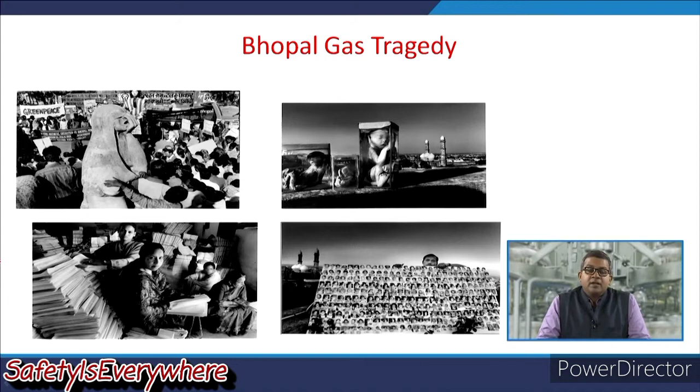Now the gravity of this gas tragedy you can imagine through these photographs, and these photographs are quite disturbing, but they tell you how worst this accident was. These are some of the photographs which were published in different newspapers and magazines across the globe.

The result of this release was that 500,000 people were exposed to the methyl isocyanate gas, and 25,000 have died to date as a result of their exposure. More than 120,000 people are still suffering from different types of ailments caused by the accident and subsequent pollution at the plant site.

These ailments include blindness, extreme difficulty in breathing, gynecological disorders, carcinoma, etc. This site in Bhopal has never been properly cleaned up, and it is sometimes said that it continues to poison the residents of Bhopal.

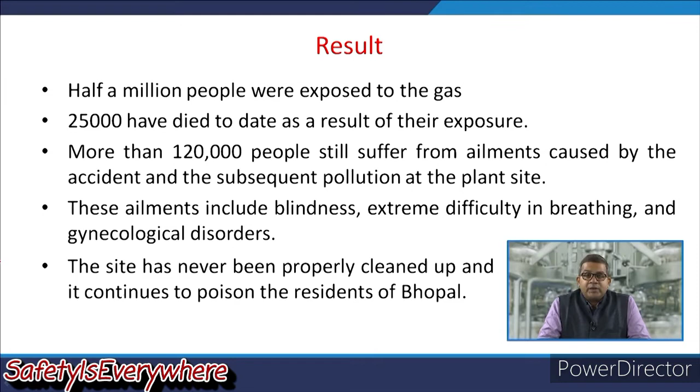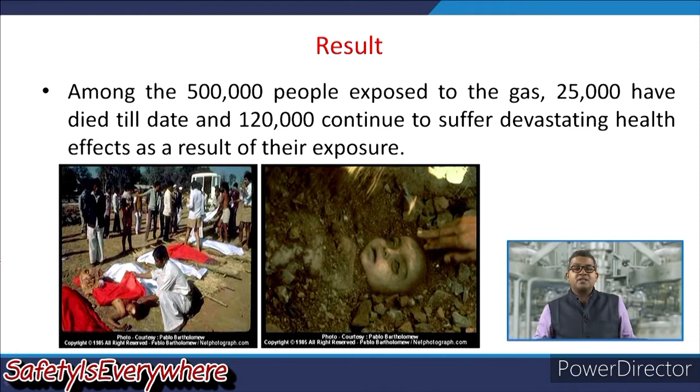The purpose of this slide is that you can imagine how severe that accident was and why we are saying this is one of the worst accidents in history. At the time of exposure, almost 5 lakh people were exposed, and people are still suffering, as you can see in these different images of the accident.

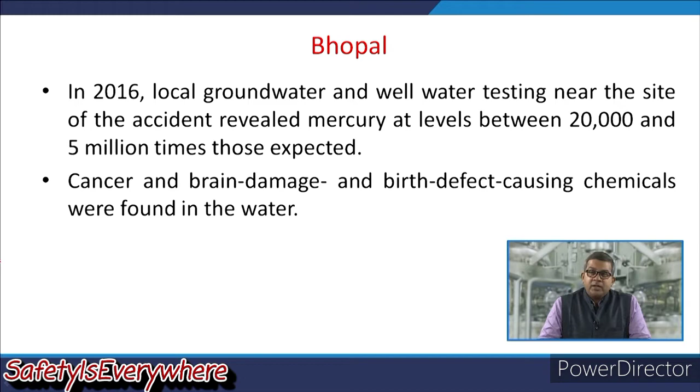In 2016, local groundwater and well water testing near the site of the accident revealed mercury levels between 20,000 and 5 million times those expected. Chemicals causing cancer, brain damage and birth defects were found in the water.

So let us have a look about this accident. At the start, we would like to have a brief knowledge about the company and its management. Union Carbide began its operations in India way back in 1904. In 1983, they were having 14 plants operating in the country.

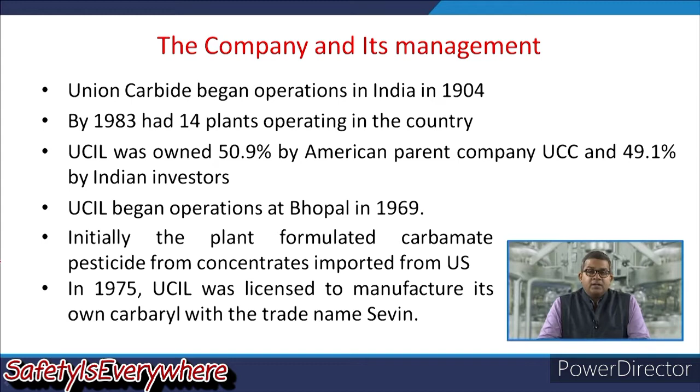At the time of the accident, Union Carbide India Limited was owned 50.9% by the American parent company, Union Carbide Corporation, and 49.1% by Indian investors. Union Carbide India Limited began operations in Bhopal in 1969, and initially this plant formulated the carbamate pesticide from concentrate imported from the United States West Virginia plant. In 1975, they were licensed to manufacture its own carbaryl with the trade name Sevin.

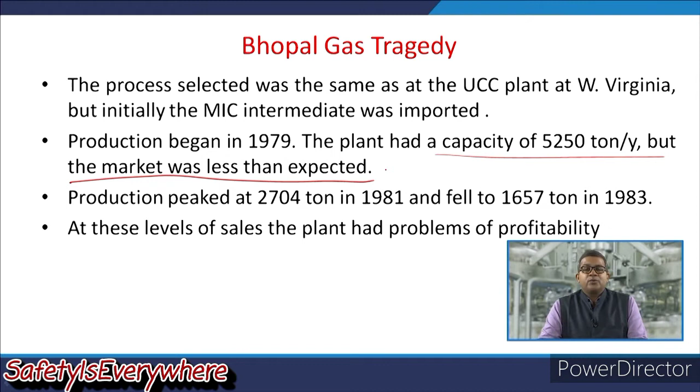While analyzing the root cause of the accident, we can remember that the market scenario was not up to the mark for Union Carbide, and this is one reason why they curtailed several safety measures, because the plant was running under loss. Production peaked at 2,704 tons in 1981 and fell down to 1,657 tons in 1983. At these levels, the sales of the plant had the problem of profitability, and that's why they were forced to curtail several safety measures and other trained workers.

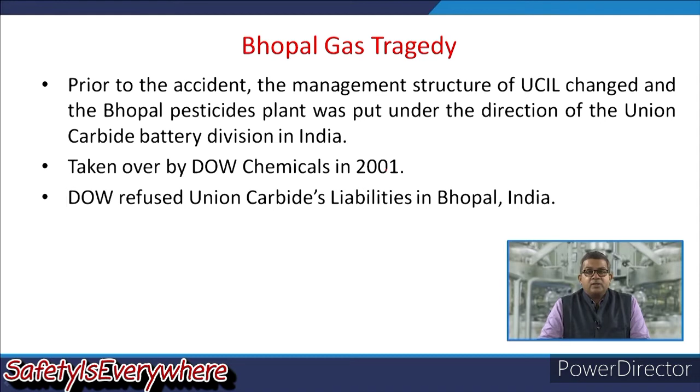Prior to the accident, the management structure of UCIL changed, and the Bhopal pesticide plant was put under the direction of the Union Carbide Battery Division in India. The entire Union Carbide operation globally was taken over by Dow Chemicals in 2001, but Dow Chemical refused to take any kind of Union Carbide's liability in Bhopal.

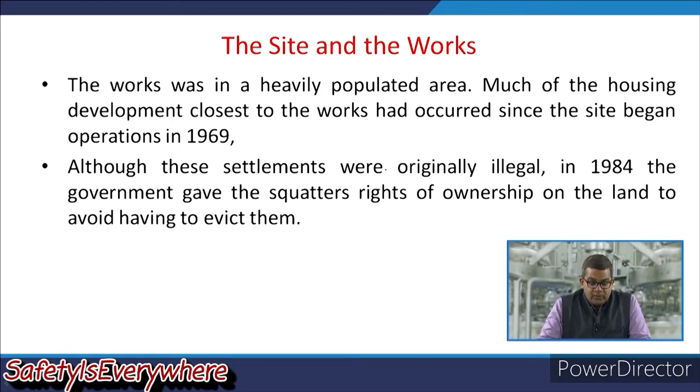So this is the site, it's Bhopal, and this is the site of that particular Union Carbide plant. This is the upper lake, and this was the Union Carbide plant, and these two were the nearby hospitals, and this is the railway line.

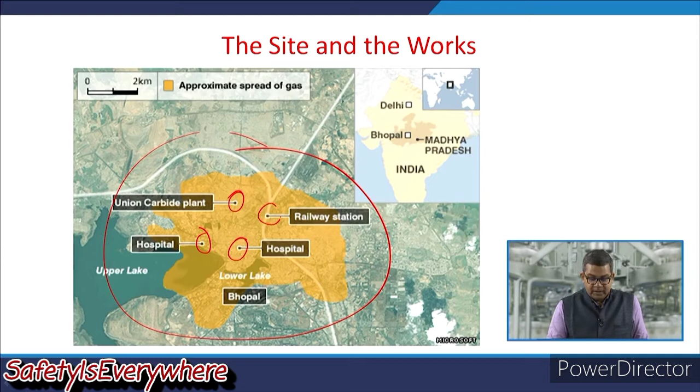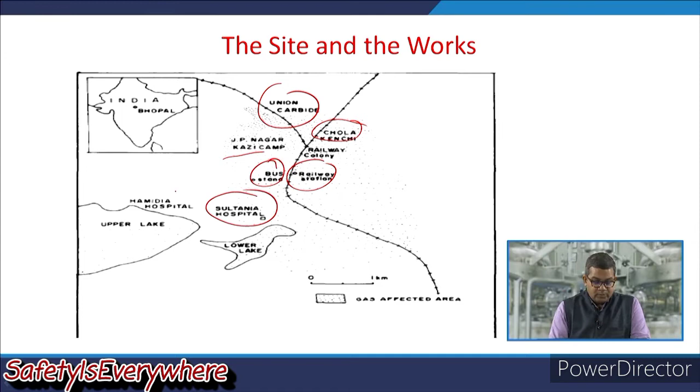Now you can have a more specific look of this site. This was the Union Carbide plant adjacent to the JP Nagar and the Kazi camp and Chola Kenchi and bus stand, railway line. There were two hospitals, Hamidia hospital and Sultania hospital.

Now this is the process, because this is the prima facie important aspect for any accident investigation, to have a look at the process and the plant scenario. So Union Carbide used to produce phosgene on site. The phosgene used to react with monomethylamine, MMA, to give methyl carbamoyl chloride, MCC, with hydrogen chloride and a little bit of heat being liberated. So this is purely an exothermic reaction.

Now this methyl carbamoyl chloride is subjected to destructive distillation, producing methyl isocyanate and HCl.

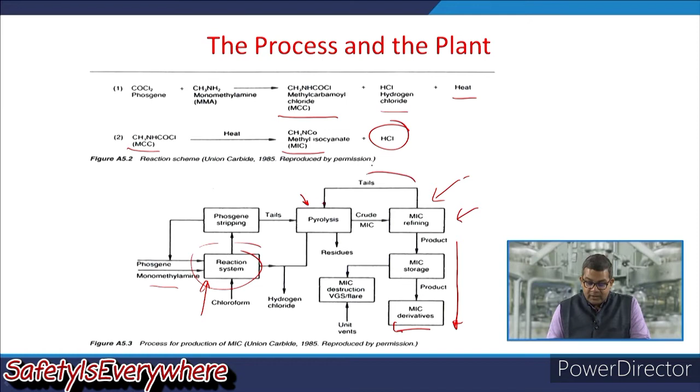Now this is the flow diagram of the entire production facility. The phosgene and monomethylamine reaction system had a chloroform quenching step, and then this entire content was subjected to pyrolysis, and through pyrolysis the product MIC is subjected to refining. It is subjected to MIC storage and different derivative streams, and whatever is left behind, like tails etc., is sent back to the pyrolyzer, and hydrogen chloride etc. are just reaction byproducts.

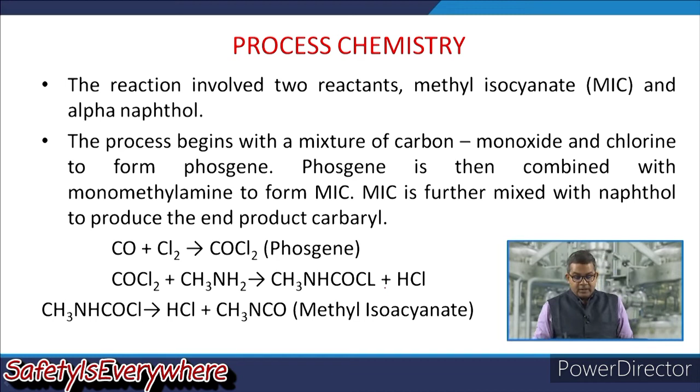So basically the reaction involved two reactants, methyl isocyanate and alpha naphthol. The process begins with the mixture of carbon monoxide and chlorine to produce phosgene, and phosgene is then combined with monomethylamine, as in this particular slide, to form MIC. Now MIC is further mixed with naphthol to produce the end product carbaryl. So this was the entire stream, and the chemical reactions are given in these lines.

So phosgene was produced on site by reacting chlorine and carbon monoxide, and this carbon monoxide was also produced on site. That's why when the gas initially leaked, the prima facie information provided by Union Carbide to the local authorities was that it was chlorine. But the treatment of chlorine is entirely different from methyl isocyanate. We will discuss this particular aspect in due course of time.

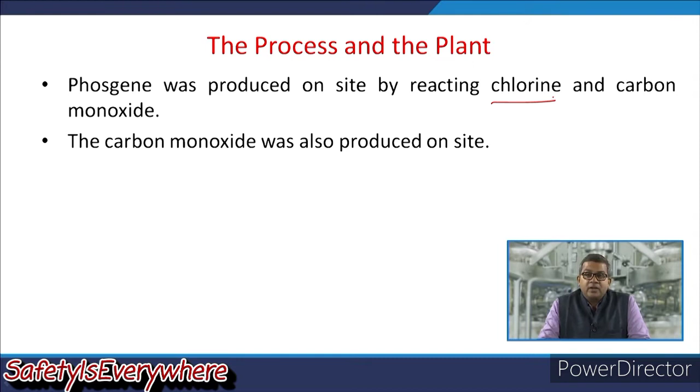Now let us look at the main problematic area, the MIC storage system. The MIC storage system consisted of 3 storage tanks, 2 for normal use, tank number 610 and 611, and 1 for emergency use, named tank number 619. You can see the entire storage battery here. These tanks were 8 feet in diameter and 40 feet long, with a capacity of 15,000 US gallons each, and they were made of SS304.

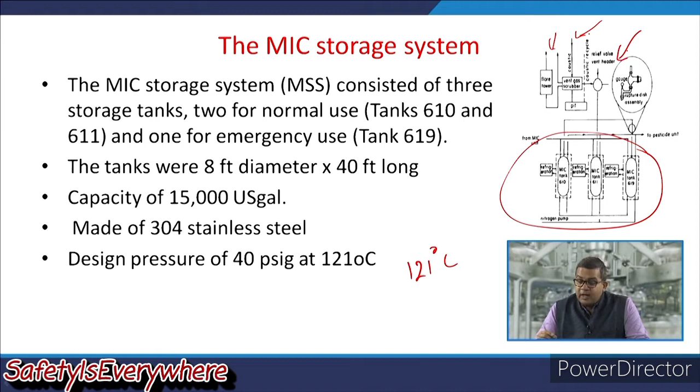The design pressure of each tank was 40 psig at 121 degrees Celsius. Now these are critical parameters because when the accident took place, the temperature was on the higher side, as well as the pressure. Every tank in this entire storage battery was fitted with different safety measures: a vent gas scrubber, a flaring tower, and a relief valve vent header, and these were the cause of the release.

So in a nutshell, when we discuss all these things, let's first have a look at the root cause. Somehow the pressure inside a tank was built up, and MIC escaped through the relief valve vent header, which was primarily meant for taking care of pressure release.

This is subjected to the vent gas scrubber, so if there is any kind of leak of MIC, it can be scrubbed out with the help of a caustic solution, and whatever off gases remain can be flared off. So the entire assembly, the entire plant, had very good safety norms.

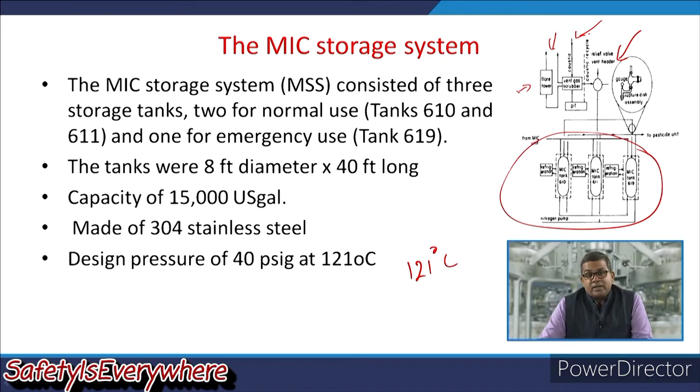Now there are 2 issues. One is that since they were very much aware about the gravity of this MIC, why was the proper information not passed on? And the second issue is why these safety devices were not actuated at the time of the accident. We will discuss these things in due course in this particular module.

Now let us have the autopsy of these safety devices.

There were two vent headers going into the column. One was the process vent header, PVH, which collected the MIC system vent, and the relief valve vent header, which is the safety device that collected the safety valve discharge. So whatever discharge was there from the safety valve, they used to collect through the relief valve vent header, and whatever system vents were there for MIC, that was collected through the process vent header.

Each vent header was connected both to the VGS and the flare, and could be routed to either. The vent stack after the VGS was 100 feet in height.

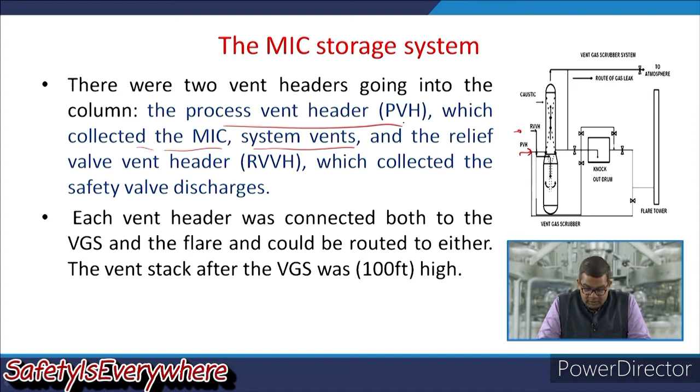The VGS, the vent gas scrubber, had the function of handling the process vents from the PVH and receiving contaminated MIC in either vapor or liquid form, and destroying it in a controlled manner.

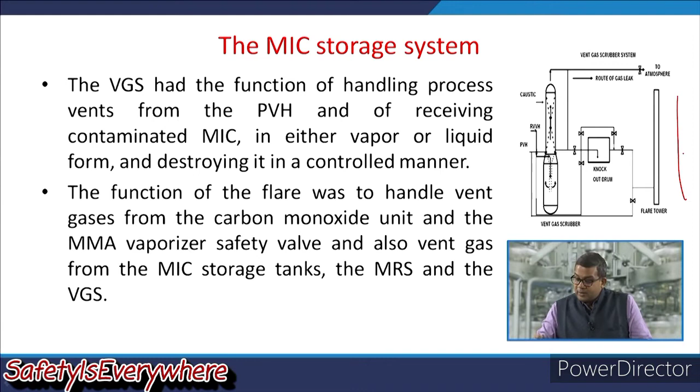The function of the flare was to handle vent gas from the carbon monoxide unit and MMA vaporizer safety valve, and also vent gas from the MIC storage tank, MIC refining still, and the vent gas scrubber. So everything dangerous was ultimately subjected to this flaring tower for destructive flaring off.

Now let us have a look at methyl isocyanate and its properties. We are discussing the abridged MSDS of methyl isocyanate. Methyl isocyanate is a colorless liquid with a normal boiling point of 39 degrees Celsius. It has very low solubility in water.

It is relatively stable when dry, but is highly reactive, and in particular it can polymerize and will react with water. It is flammable and has a flash point of minus 18 degrees Celsius and a lower flammability limit of 6% volume by volume.

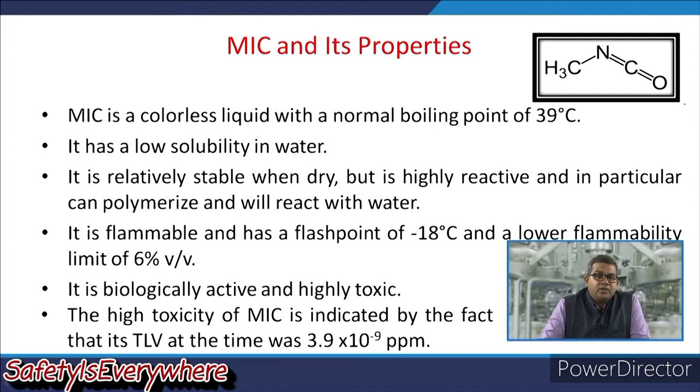It is biologically active and extremely toxic in nature. The toxicity of MIC is indicated by the fact that its TLV is very low. At the time of the accident it was very low.

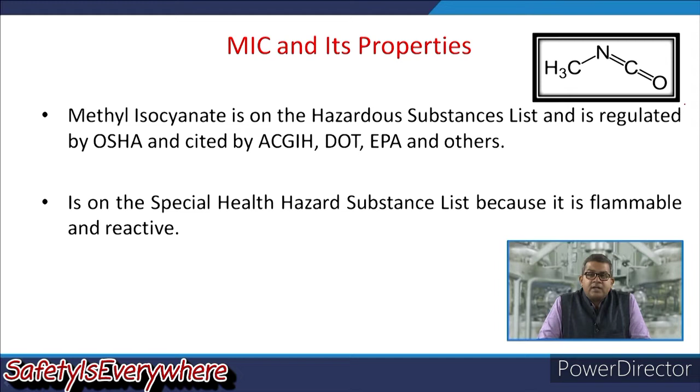This MIC is on the hazardous substance list and is regulated by OSHA, the Occupational Safety and Health Administration, United States, and cited by ACGIH, the Department of Transportation, the Environmental Protection Agency, and others. So it is on the special hazard substance list because it is flammable and extremely reactive.

This MIC is an irritant gas and can cause lung edema, but it also breaks down in the body to form cyanide. The route of this breakage is again important because it was the root cause of so many fatalities.

This MIC can undergo exothermic polymerization to the trimer, a reaction catalyzed by hydrochloric acid and inhibited by phosgene. It also reacts with water, with iron being a catalyst for this reaction, and this reaction is strongly exothermic. This reaction took place in the storage facility of MIC, and that was the root cause of that particular accident.

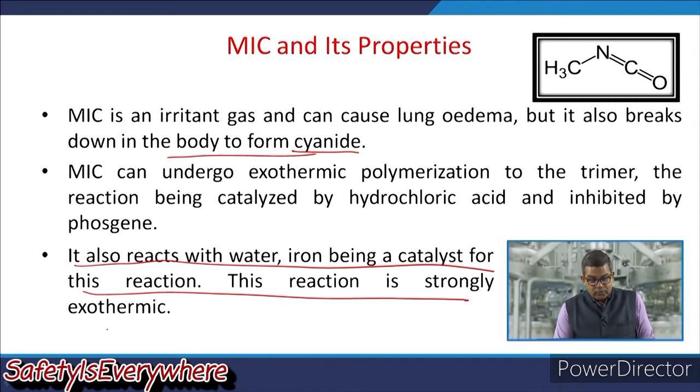Now, its vapor is twice as heavy as air. The vapor used to stay close to the ground when released. MIC and water react to yield methylamine and CO2.

We have presented two reaction streams. One is when water is in excess, which produces 1,3-dimethylurea, and when MIC is in excess, it produces 1,3,5-trimethylbiuret. Upon polymerization, this gives trimethyl isocyanurate, and the formation of this particular component was the cause of this worst tragedy. The methylamine usually reacts further with MIC and other reactants to produce 1,3-dimethylurea. We have presented these two reaction streams for a better look at the root cause: if water is in excess, we get one product, and if MIC is in excess, we get the other.

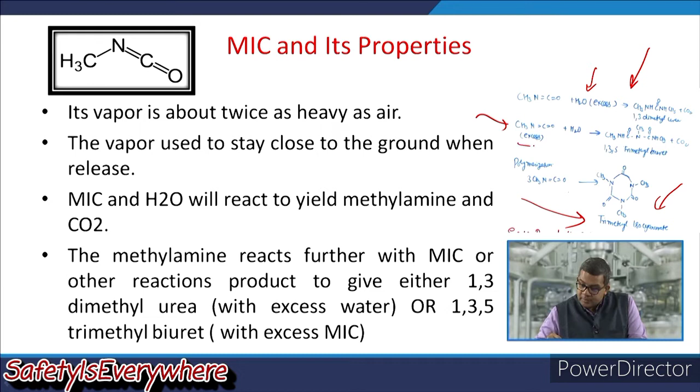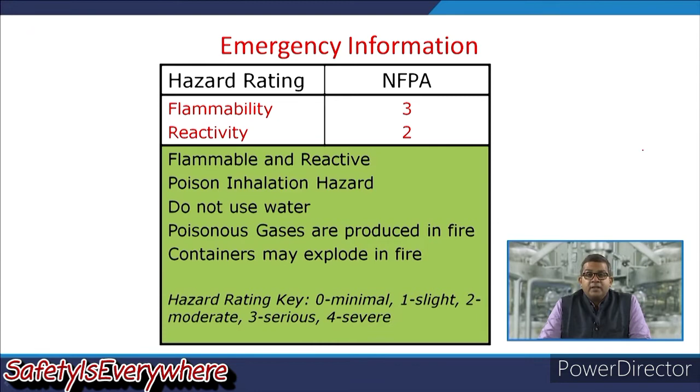Now this is the emergency information and hazard rating. It is extremely flammable, so the flammability rating is given as 3, and the reactivity is also on the higher side, given as 2. So it's flammable and reactive, a poison inhalation hazard, and it is advised while using MIC not to use water, because as we have seen, it may react with water to form the isocyanate products. These poisonous gases are produced in fire, and containers may explode in fire.

At the time of the accident, various other chemicals were stockpiled by Union Carbide at the Bhopal facility, including methylene chloride, methanol, and others used in various reactions. They used to produce phosgene from carbon monoxide and chlorine, and this phosgene was used to produce MIC and other products. They used a variety of chemicals including different solvents and catalysts like trimethylamine, and they produced various products like carbaryl and sevin.

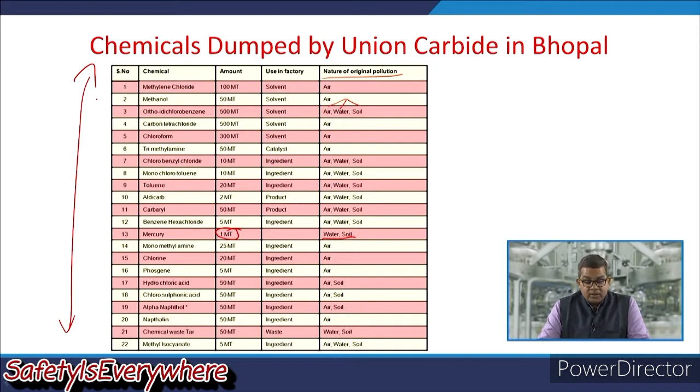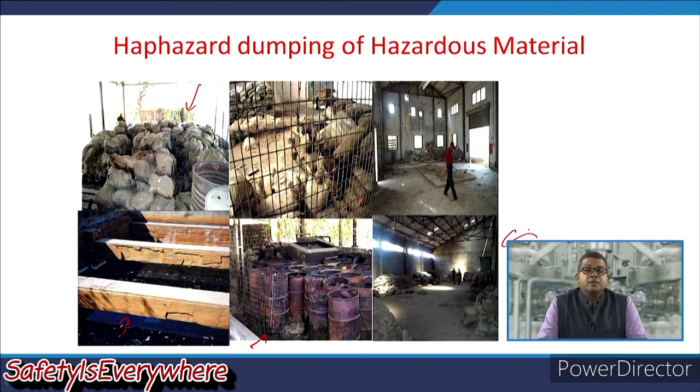In this slide we have listed the nature of the original pollution, which could be in air, water or soil. For example, they had one metric ton of mercury, an extremely dangerous substance that could contaminate water and soil. They had a large inventory of chemicals in the plant, and we've listed the amounts dumped by Union Carbide at Bhopal. This was again on the excess side. You can see this haphazard dumping of hazardous materials - they were not following proper storage protocols for these chemicals.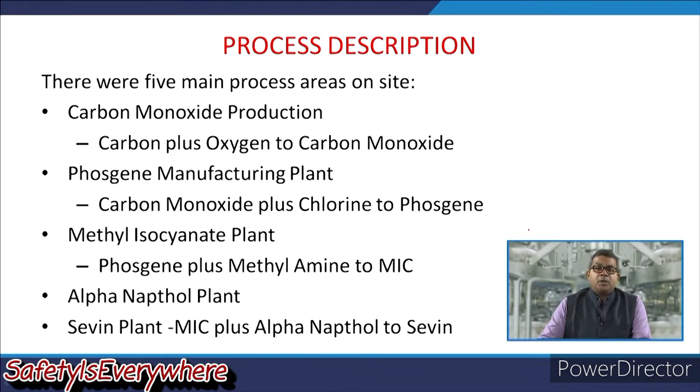Now let us look at the process description. There were five main process areas: carbon monoxide production from carbon plus oxygen, the phosgene manufacturing unit combining carbon monoxide plus chlorine, the MIC plant where phosgene plus methylamine produced MIC, and the alpha naphthol plant producing Sevin from MIC plus alpha naphthol. This last process involves the chemical reaction and distillation to give MIC.

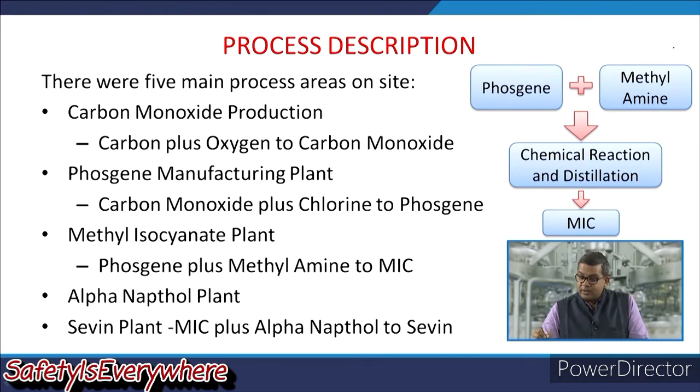There were several events attributed prior to the release. In 1982, a Union Carbide Corporation team from the United States, including safety personnel, visited the Bhopal facility. Their report gave a favorable summary overall but listed 10 safety concerns, including the potential for release of toxic material in the phosgene or MIC unit area or storage area, due to equipment failure, operating problems, or maintenance issues.

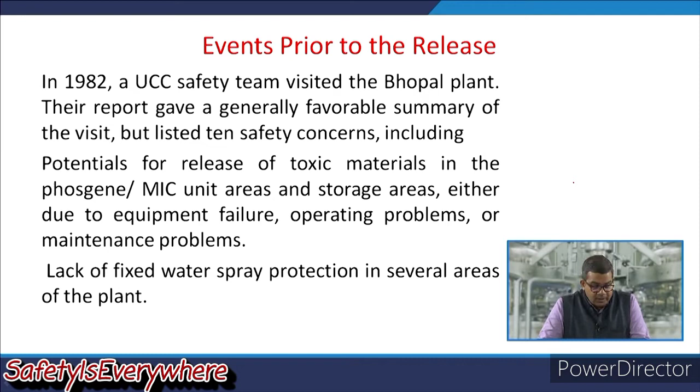They noted a lack of fixed water spray protection in several areas of the plant, and several deficiencies in safety valves and instrument maintenance programs. They reported deficiencies in master lockout procedure application. There were also several problems created by high personnel turnover at the plant, particularly in operations - as we've already discussed, this turnover was due to the plant running at a loss.

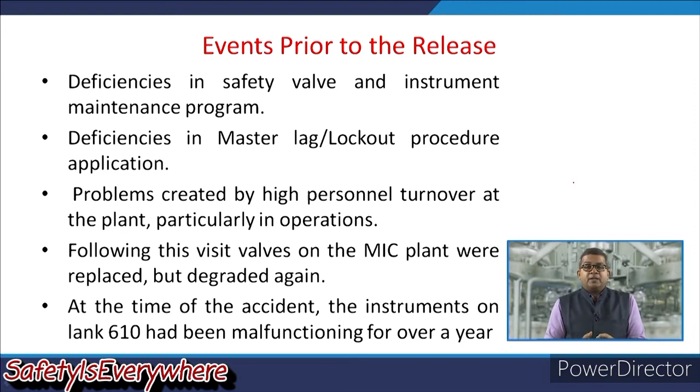Following this visit, the valves on the MIC plant were replaced but degraded again. They never investigated why these MIC valves kept degrading repeatedly. Had they noticed and analyzed this aspect, the problem could have been rectified much earlier than this worst accident. At the time of the accident, the instruments on tank number 610 had been malfunctioning for over a year, an outcome identified by a safety review.

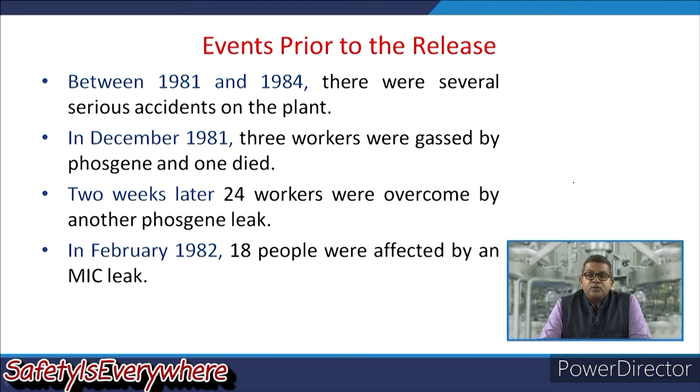Between 1981 and 1984, there were several serious accidents at the plant. In December 1981, three workers were gassed by phosgene and one died, but the root cause was never investigated. Two weeks later, 24 workers were overcome by another phosgene leak. In February 1982, 18 people were affected by an MIC leak.

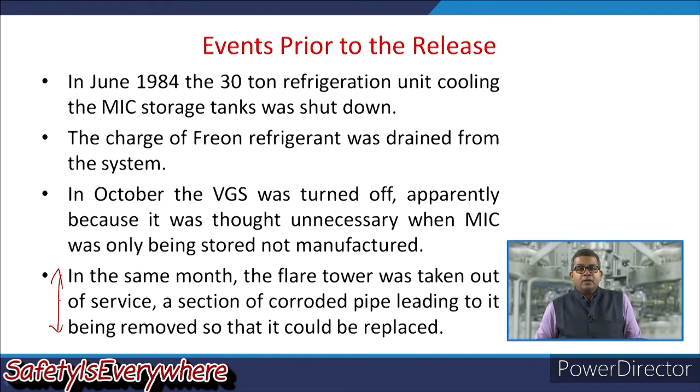In June 1984, the 30-ton refrigeration unit cooling the MIC storage tank was shut down, and the freon refrigerant charge was drained from the system - because they weren't producing MIC continuously, only storing it, so they turned off the refrigeration plant. In October of the same year, the vent gas scrubber was turned off, apparently thought unnecessary since MIC was only being stored, not manufactured. Also that month, the flare tower was taken out of service, and a section of corroded pipe leading to it was removed for replacement - but timely replacement and repair of the corroded pipe was not carried out before the accident.

Another feature was difficulty experienced in pressurizing the MIC storage tank - if noticed beforehand, this would be considered a near miss. It appeared that since nitrogen was passing through the makeup valve satisfactorily, the blow-down valve was leaking and preventing pressurization. They noticed and tried to analyze it but failed due to lack of technical competency or knowledge. According to plant workers, there were other instrumentation failures - the high temperature alarm had long been faulty, and there were also faults in the pressure controller and other level indicators.

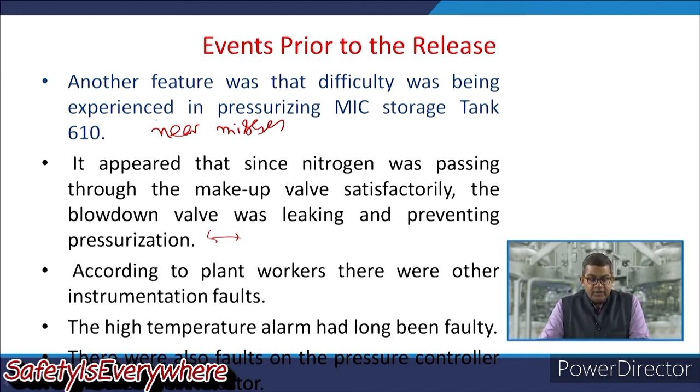This particular plant, because of the gravity and sensitivity of that particular component, had a very good system of alarming and a very good system of safety. But the question was, at the time of the accident, none of them was working properly. The plant had a toxic gas alarm system.

This consisted of a loud siren and a muted siren to warn the public, so sometimes they used to operate the muted siren. If they used the loud siren, there may be an unnecessary panicky situation for the outside public. That's why they had two different types of sirens within the plant periphery.

These two sirens were linked and could be activated from the plant toxic alarm box. The loud siren could be stopped from the control room by delinking the two.

The plant workers stated that on the morning of 2nd December, a washing operation was carried out, and the plant officials were given orders to flush out the downstream section of the 4 filter pressure safety valve lines.

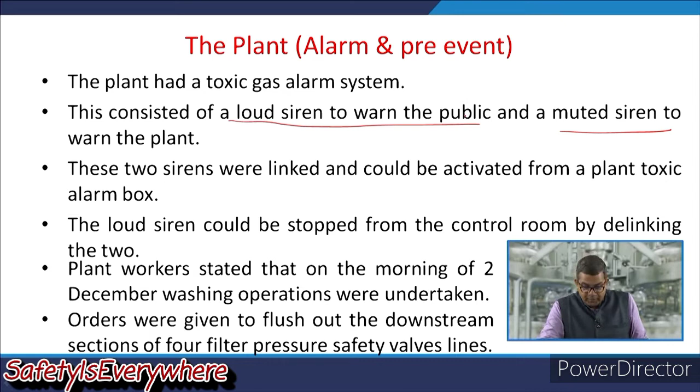It was suggested that water might have entered the MIC storage tank 610, which was the storage tank battery. They anticipated two causes: one, that water was deliberately added at this point in time; another, that water was added here and leaked through the relief system back to the storage tank.

If this possibility persists, then again there was a lack of training, because primarily it is required that a blind or a blank should be inserted to prevent the entry of water to the storage area.

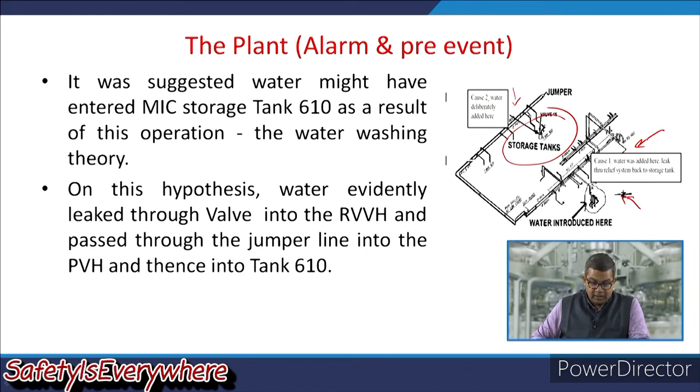On this hypothesis, the water evidently leaked through the valve into the relief vent valve header and passed through the jumper line into the process vent header and then into tank number 610. These are the jumper lines, and this is the actual figure of the jumper line.

When it entered the storage tank, let us have a containment description of the MIC storage tank. This tank had a diameter of 2.4 meters and a length of 12 meters. It is duly supported by a safety valve with a bursting disc, equipped with a refrigeration unit, having a ground level concrete deck. As we've already discussed, the design pressure was 40 psig, and it had a high purity nitrogen blanketing system and a process vent header line.

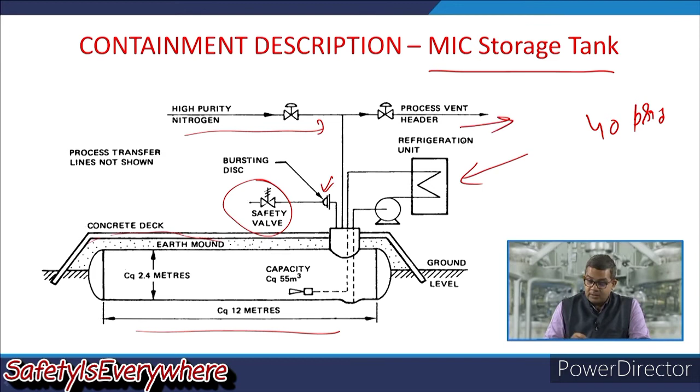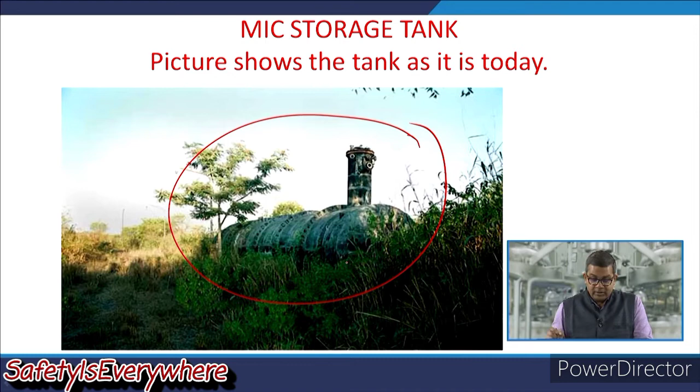This is a picture of the tank as of today. It has just been unearthed so that it can be inspected clearly. This is a picture of a section of the tank after the incident, in an upturned position.

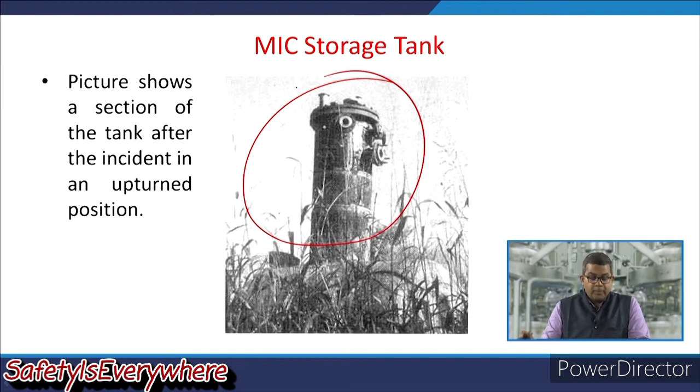Now let us talk about the release. On the evening of 2nd December, a shift change took place on the plant at around quarter to 11 p.m. At 11 p.m., the control room operator noticed the pressure in tank 610 was 10 psig. It was a bit higher than normal, but within the safe range of 2 to 25 psig. Remember, the design pressure of the storage tank was 40 psig.

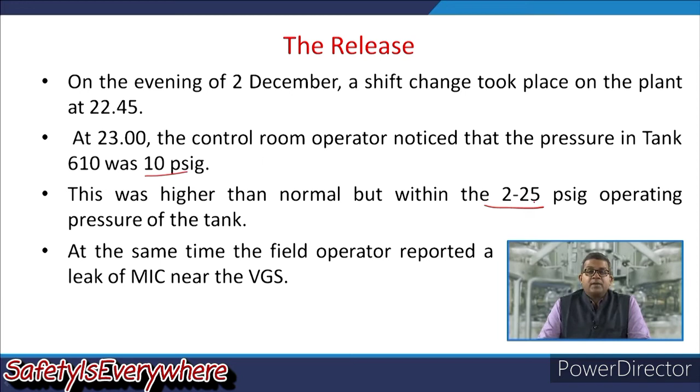At the same time, the field operator reported a leak of MIC near the vent gas scrubber. At 12:15 a.m., the field operator reported an MIC release in the process area, and the control room operator saw that the pressure on tank 610 was now 30 psig and rising rapidly, meaning there was a chance of a runaway reaction.

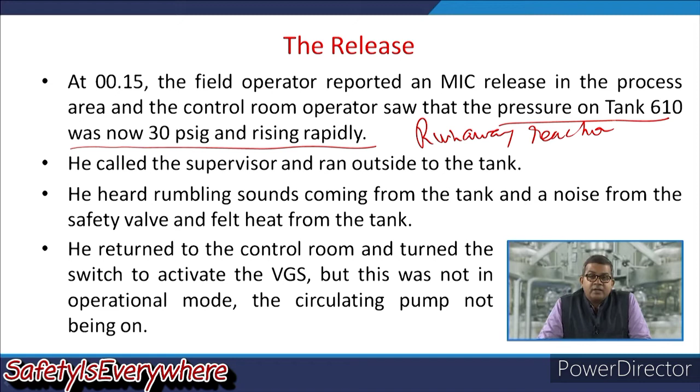He called the supervisor and ran outside to the tank, heard a rumbling sound coming from the tank and a noise from the safety valve, and felt heat from the reaction, meaning the exothermicity was on the higher side.

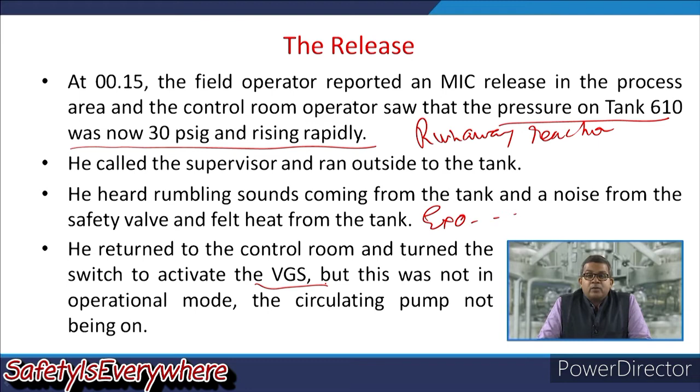He returned to the control room and turned the switch to activate the vent gas scrubber, but at this time it was not in operational mode, because as we enlisted in the events prior to the accident, this vent gas scrubber was turned off since they thought MIC was being stored, not continuously produced. So he tried to open the circulating pump, which was again not in operational mode.

At 12:20 a.m., the production supervisor informed the plant superintendent about the release, and a quarter to 1 a.m.

Operation in the derivative unit was suspended due to the high concentration of MIC. This high concentration is attributed to the fact that MIC was continuously being released, and the temperature was on the higher side because of the exothermicity of the runaway reaction, so the pressure was again built up. This attributed to the high concentration of MIC in the derivative unit.

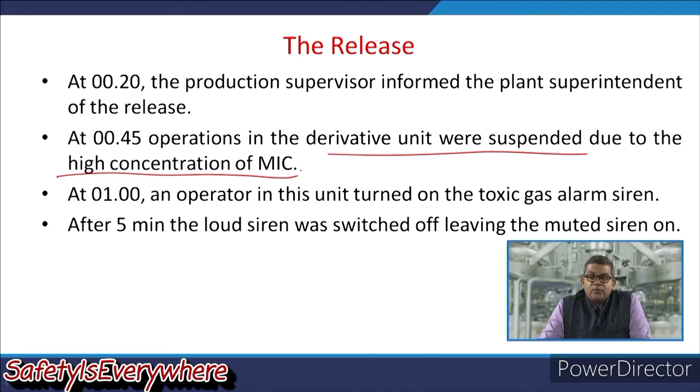At 1 a.m., an operator on this unit turned on the toxic gas alarm siren, and after 5 minutes the loud siren was switched off, leaving the muted siren on. That means they declared the emergency within the plant.

At about the same time, the plant superintendent and the control room operator verified that MIC was being emitted from the vent gas scrubber to stack to the atmosphere, and turned on and directed the stack fixed fire water monitoring system to knock down the vapor.

Steam was continuously issuing from the crack in the concrete, showing that the tank was hot. The reason for the steam was that water was inside the tank, and a runaway reaction was leading towards exothermicity of the reaction, and that was the cause of the steam generation within tank 610.

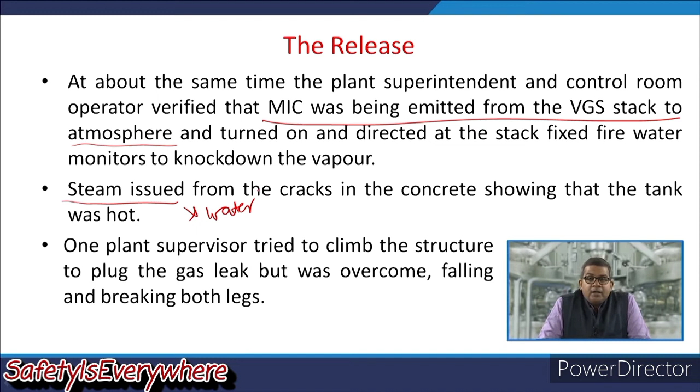One plant supervisor tried to climb the structure to plug the gas leak, but was overcome and fell, breaking both legs. That was the only injury that took place within the plant premises.

Sometime between 1:30 to 2:30 a.m., the safety valve on tank 610 was reseated and the release of MIC ceased. This is attributed to the pressure lowering within tank number 610. At about 2:30, the loud siren was switched on again to sensitize the people around the plant premises.

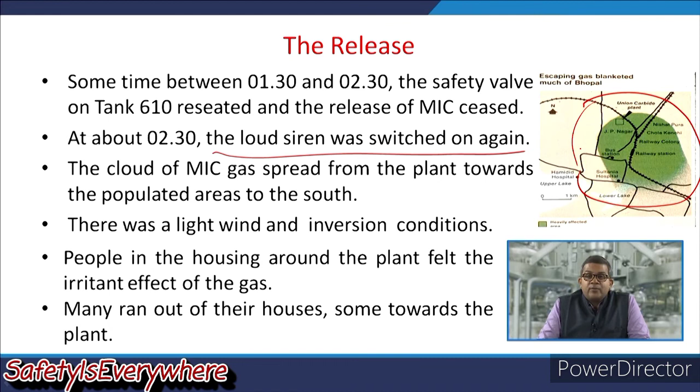The cloud of MIC gas spread from the plant towards the populated area to the south. Whenever you are performing any kind of accident investigation, this type of meteorological information plays a very vital role in the analysis. There was a light wind and inversion conditions because it was the month of December.

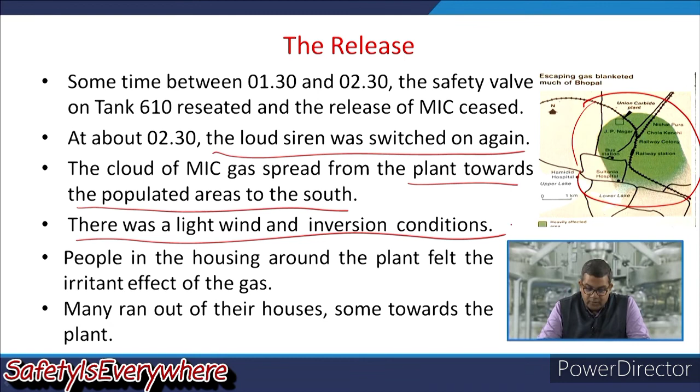People in the housing around the plant felt the irritant effect of the gas. Many ran out of their houses, and some ran towards the plant to inquire what was wrong with it. Within a short period of time, animals and people began to die.

In a railway colony some 2 kilometers from the plant, where nearly 10,000 people lived, it was reported that within 4 minutes, 150 died, 200 were paralyzed, 600 rendered unconscious, and 5,000 were severely affected.

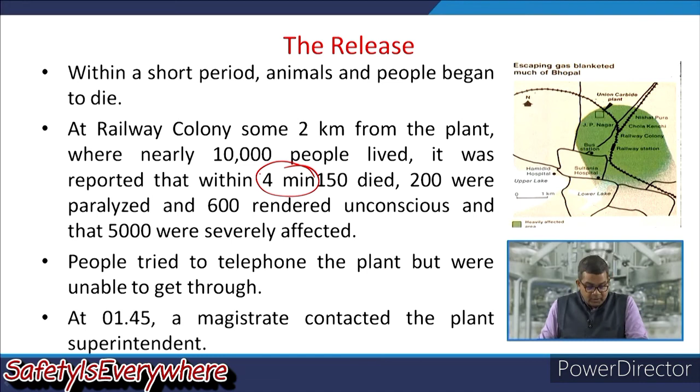People tried to telephone the plant, but within that time of just a few minutes, they were unable to get through to contact the plant officials. At 1:45, a magistrate contacted the plant superintendent, and still the cloud of that toxic gas hung around the area.

The gas cloud hung around for the entire day of 3rd December 1984. During the day it stopped moving towards the city, but resumed its movement in that direction during the night.

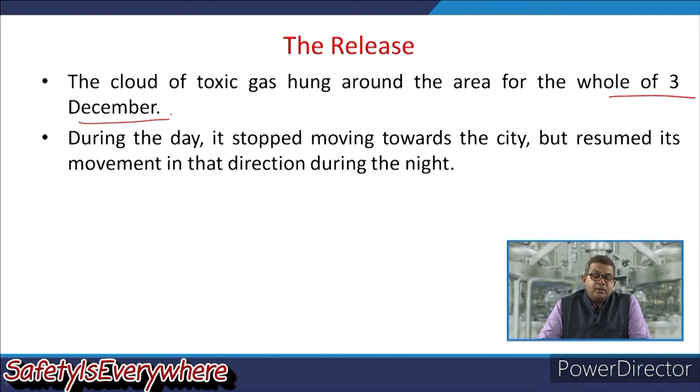At that particular time, it was the duty of the plant officials to provide adequate knowledge to the local authorities, because they practically knew that this was MIC, and they knew how bad this particular chemical was. Then there was a scenario of emergency, and a large number of people were affected by the toxic gas.

A very large number fled their homes, and two hospitals, Hamidia and Jayaprakash, were flooded with people and casualties. Difficulties were compounded by the fact that it was unknown what the gas was and what its effects were.

That means the company provided very little information on this aspect. There was speculation about the gas, including the suggestion that it was phosgene or chlorine, which was the first-hand information provided by Union Carbide India Limited.

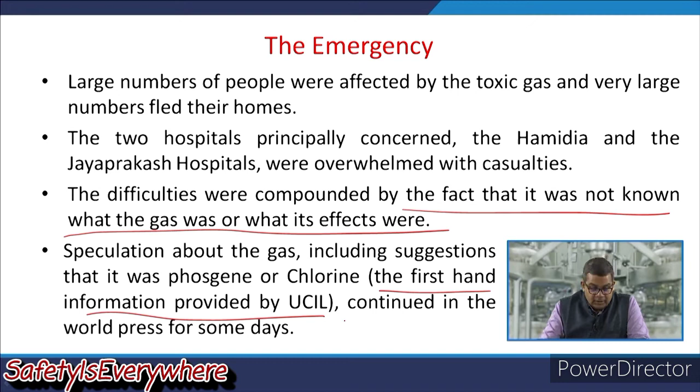If it is chlorine, then the remedial measures are entirely different from methyl isocyanate. So this is purely speculation at the time of the release. That is why the company was charged with providing very little advice in this context.

If you recall, we had a discussion about the MSDS. In the MSDS, it usually gives information about any kind of spill or leak, and what kind of first aid treatment you require.

Initially, the company provided information that MIC causes only eye irritation and is not lethal. However, this is practically not true, because the MSDS gives proper information. On 3rd December, doctors at Gandhi Memorial College carried out the first autopsy, which gave strong evidence of cyanide poisoning.

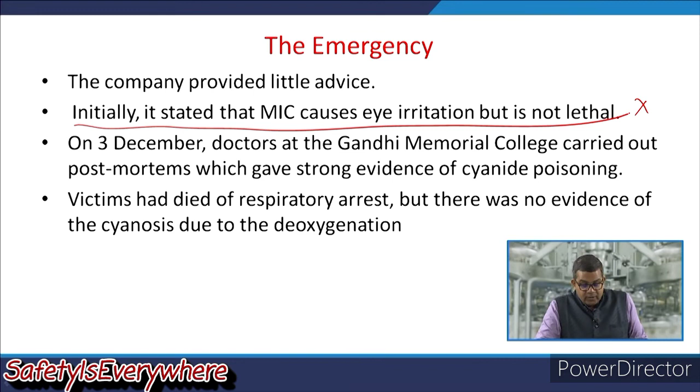Now, when there was a question of remedy, a conflict of views developed on appropriate treatment. The standard treatment for cyanide poisoning is sodium thiosulfate, that is hypo solution. One group took the view that this should not be given until the cyanide poisoning was established by analysis. Another suggested that it was well known that in cyanide poisoning, the cyanide may be metabolized, leaving little trace. So people were fighting over what they needed to give the victims, because sodium thiosulfate on its own had several disadvantages.

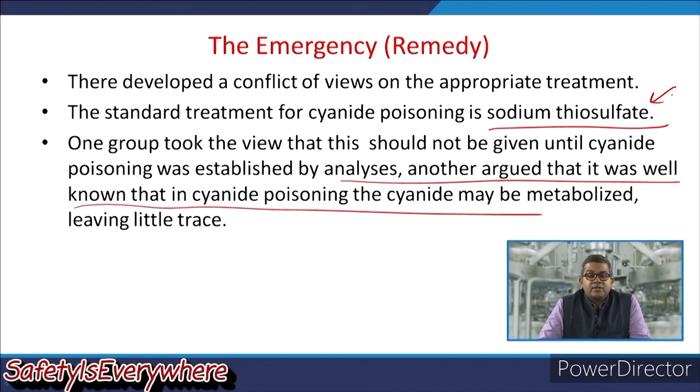So there followed a period in which the advice given was not clear. It was not until 3rd of February that an authoritative and unambiguous recommendation that sodium thiosulfate be used was issued by the Indian Council of Medical Research.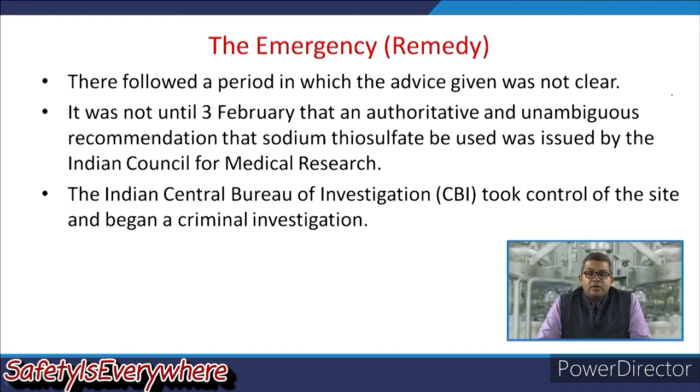Then, at the time of the incident, the CBI, the Central Bureau of Investigation, took control of the site and began a criminal investigation. The investigation was started in twofold: one was carried out by the Government of India, and another was carried out by the Union Carbide India Limited. So let us have a look at the Government of India investigation.

The Government of India undertook the investigation and formed an investigation team led by Professor Varadarajan, who was the chairman of the Council for Scientific and Industrial Research at the time of the accident.

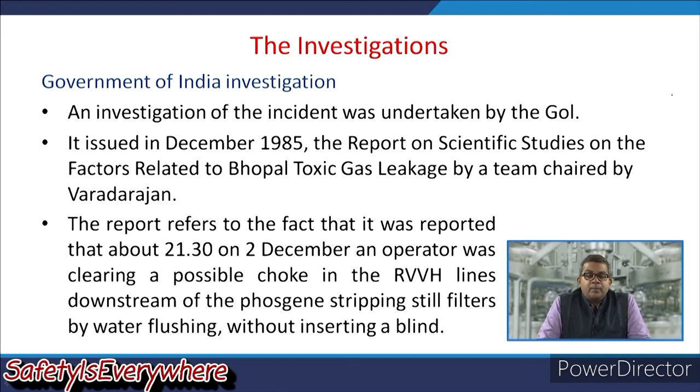The report states that it was reported that at around 9:30 p.m. on 2nd December, an operator was clearing a possible choke in the relief valve vent header lines downstream of the phosgene stripping still filter by water flushing, without inserting a blind. That was the root cause of this accident.

So this was the vent gas scrubber with the caustic, and this was the relief valve head, the vent header. He was trying to clear any possible choke in these lines, but he probably forgot to insert a blind within this system.

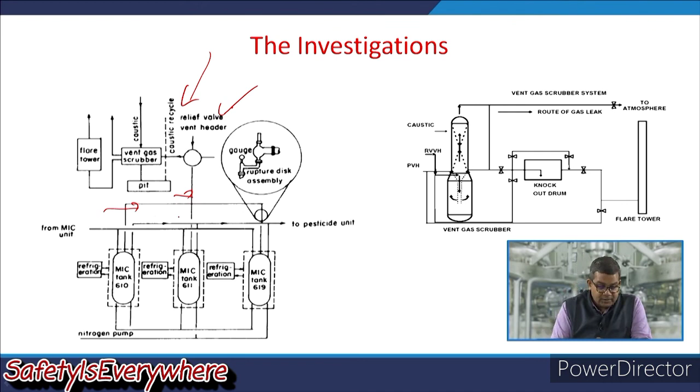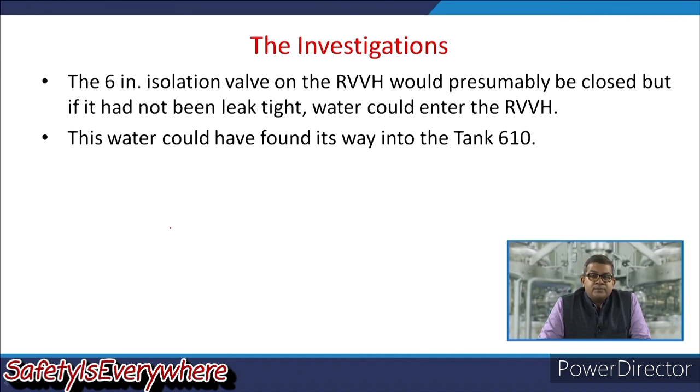The 6-inch isolation valve on the relief valve vent header would presumably be closed, but if it had not been leak-tight, water could enter the RVVH. It was mandatory at the time that either a blind or a blank should be inserted, because if this isolation valve is not tight enough, water may enter into tank 610. So, in this way, water could have found its way into tank number 610.

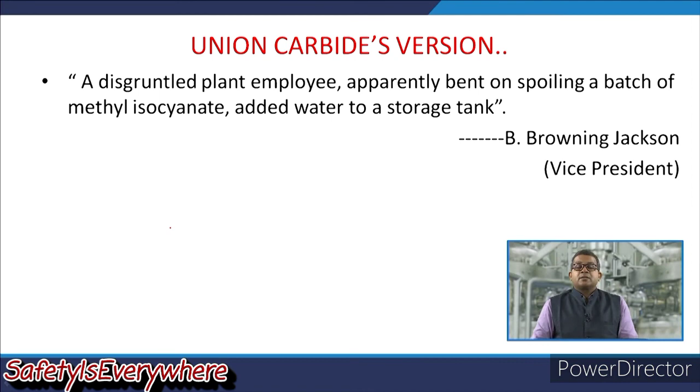A debatable version was given by the Vice President of Union Carbide, Browning Jackson, that a disgruntled plant employee, apparently bent on spoiling a batch of methyl isocyanate, added water to a storage tank. This led to another theory, called the sabotage theory. If it was established, then Union Carbide might not be in a position to pay any kind of compensation toward this accident.

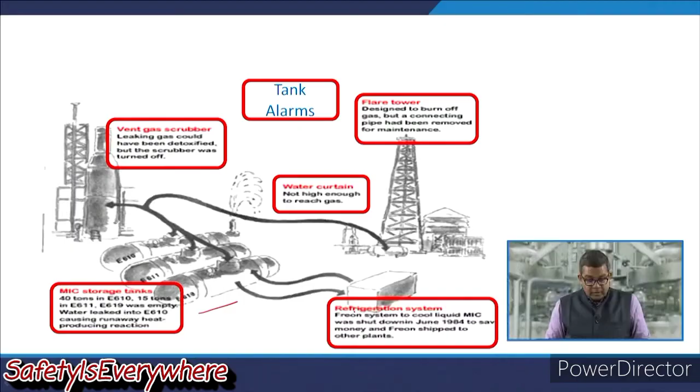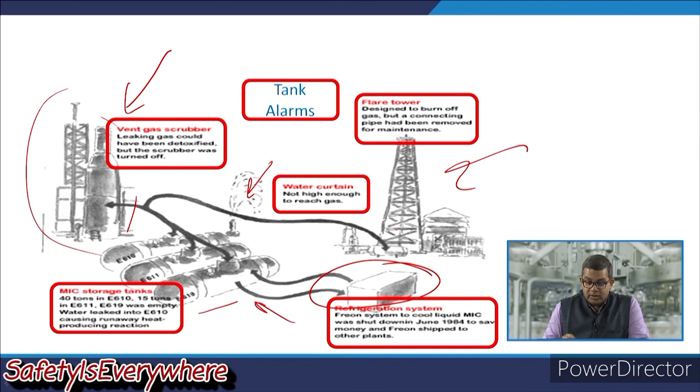This particular storage battery was supported by the refrigeration system, and a freon refrigeration system was used. This is the flaring tower, and this was the vent gas scrubber. You can see the different pipelines, this one being the refrigeration system. They are all interconnected, and the water curtain was not given enough height to reach the gas. This vent gas scrubber is duly connected with the flaring tower for the destructive decontamination of various off-gases collected from various parts of the plant.

So in this module, we have discussed the Bhopal gas tragedy: the introductory part, the process, and the release aspect of methyl isocyanate. We have also started the discussion about the various investigatory aspects of this gas release. In the next module, we will discuss the investigatory part of the release of MIC from the Bhopal Union Carbide facility in detail. Thank you very much.